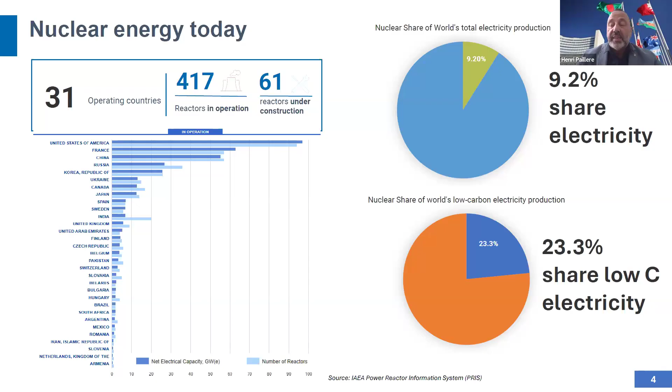But still, nuclear power represents almost a quarter of the world's low-carbon electricity, and this plays an important role in terms of climate change mitigation. I mentioned 31 countries operating nuclear power today, but we have about 30 additional countries that are looking at nuclear power and planning to embark on a nuclear program at some point.

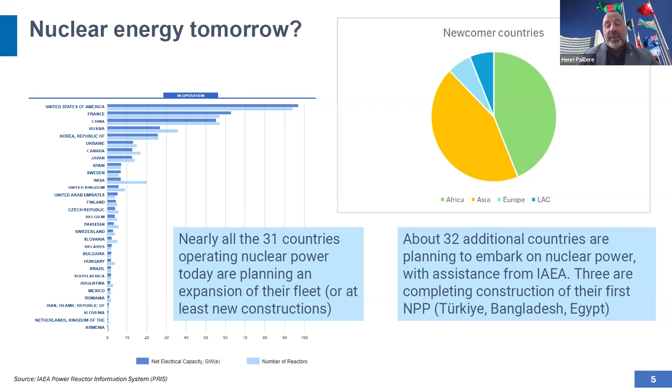The IAEA provides assistance to these member states to help them build the necessary infrastructure to be able, if they make the decision to build, to operate nuclear power plants in a safe way. Among those 32 additional countries, there are 3 that are building a nuclear power plant: Turkey, Bangladesh, and Egypt. And they will soon join the 31 countries operating nuclear power.

So why are we saying that nuclear power is making a comeback, and what are the drivers for this, I would say, revival of nuclear power? Well, first of all, the low carbon characteristics of nuclear power. I think there are always some debates about how low carbon, what is the carbon intensity of nuclear power over the full life cycle of the technology.

But I'd like to refer to a recent report from the United Nations Economic Commission for Europe. They produced a report in 2022 looking at an integrated life cycle assessment of all electricity generating technologies. And they found that actually nuclear power has the smallest carbon footprint among low carbon technologies. We have estimated that over the last 5 decades, nuclear power has avoided about 70 gigatons of CO2 globally. So that's on the low carbon side.

The sustainability is a little more challenging, and there were a number of discussions, especially in Europe, regarding the inclusion of nuclear power in the taxonomy of sustainable activities. And one of the points that was raising a question was the way the industry was managing the waste from the operation of nuclear power plants. The Joint Research Center of the European Commission produced a very thorough report that concluded that actually nuclear power is no more dangerous than any other technologies that had already been included in the taxonomy, and showed how the industry knew how to manage its waste.

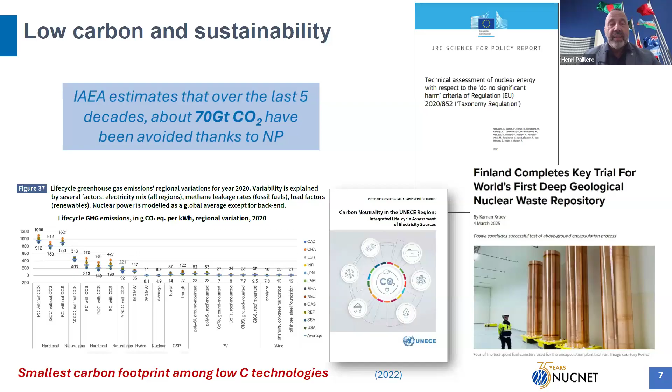Safety is also a matter that raises a lot of concern, but we'd like to look at the numbers. And here on this chart, I've looked at data from Our World in Data, where they look at the number of fatalities per technology per terawatt-hour of electricity produced. And you see that nuclear energy is actually one of the safest technologies around.

Yes, there have been some accidents, but they haven't created so many fatalities. There has been radioactive contamination of soils, as we know in Japan. It has a cost, but in terms of fatalities, overall, the data shows that nuclear is actually safer than wind or hydropower, and much safer than coal or other fossil fuels.

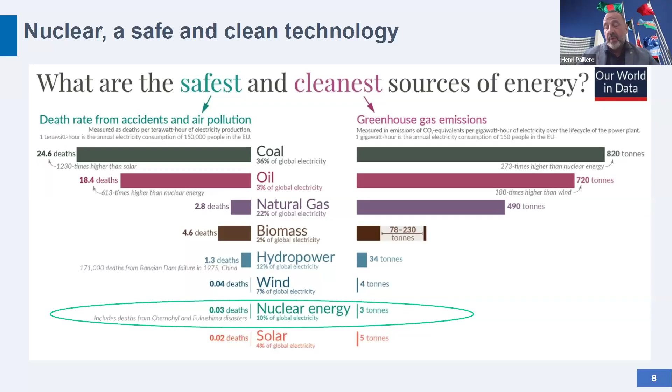One of the reasons why we're looking at nuclear again today is the way our energy systems and our electricity systems are evolving. We know that there is a strong build out of variable renewables, and this poses a challenge for the electricity systems. And nuclear power has a number of attributes that are helping to integrate large shares of renewables. First of all, it is a dispatchable technology, meaning you can generate whenever you need it.

It is flexible, even though there are some people that say that nuclear is not flexible, but there's experience, especially in France, which had from the start the plan to build a very large fleet of nuclear power plants and to adapt to the demand changes. For example, the reactors were designed to ramp down at night so as to reduce production. Now we're integrating technologies that have variable production, so you also need to adapt to variable production across the day.

What is important is that you need this kind of dispatchable technology and a low carbon one. So for countries that have a lot of hydro, maybe they don't need nuclear, but for those countries that have limited hydro resources, nuclear could be an important option.

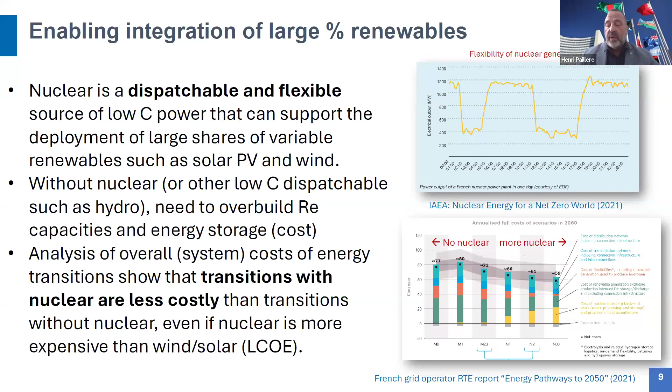A very important aspect also of the transition is the overall cost of the system transition. And what we have found, what a number of institutes have found, is that if you have nuclear in your system, you don't need to overbuild your renewable capacity, you don't need to oversize your storage, and so the cost of flexibility is less, and it translates into a lower overall cost for the system when you have nuclear as part of the mix.

Security of energy supply has been an important driver in the last couple of years, and nuclear helps to contribute to the security of energy supply. And in a way, it's a little similar to how the nuclear fleet expanded in the 1970s following the different oil shocks. And what countries have rediscovered is that having nuclear in their mix helps to secure energy supply.

The cost of the nuclear generation is not so sensitive to the cost of uranium. Uranium resources are widely available, though there are some geopolitical constraints. Nuclear fuel can be stored on site very easily. And in the long term, thinking of limited resources of uranium, you have technologies that recycle the spent fuel in multiple ways, so-called fast reactors with closed fuel cycles, and they would have the advantage of being able to produce for the same quantity of uranium about 60 times more energy than the current technology.

An important aspect also of nuclear power is that in terms of dependence on critical minerals, it is, according to the International Energy Agency, one of the low carbon technologies that is the least dependent on critical minerals.

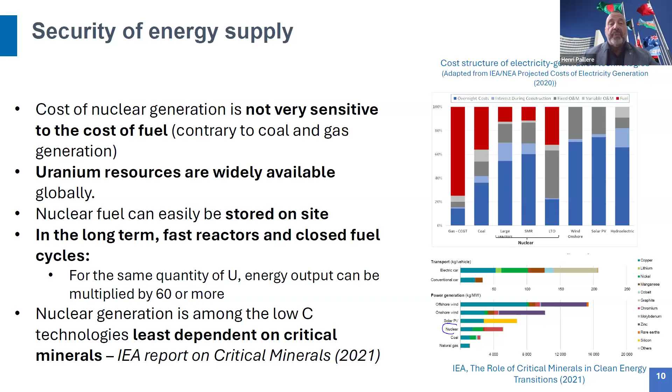Climate resilience is an issue that faces all the countries undergoing their transition. We know that climate change and extreme weather events will impact all technologies, including nuclear power, and can affect the resilience of our current and our future energy systems. Diversification of the mix helps to address the resilience of the overall system.

But from an individual point of view, we have looked at a lot of data. We at the IAEA have a database that contains all the operational data of all the reactors for the last 3 decades or more, and we've analyzed all the weather-related production losses affecting nuclear generation. For example, in summer, when you have heat waves or droughts, some nuclear power plants have to reduce their production, and that translates into a production loss.

So overall, in 2022, about 0.35% of the global nuclear generation was lost due to weather-related events. So it is there, but it is maybe more limited than people might think.

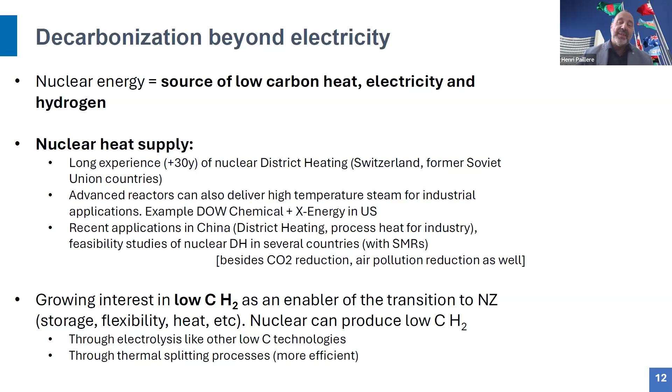Hydrogen as well at some point will also play an important role. There are different ways of producing hydrogen. What we like to say is that it is the carbon content of hydrogen that's the most important, not the color coding of hydrogen. And there are a number of projects that are assessing the production of low carbon hydrogen. I would say cost is currently an issue, and producing hydrogen from nuclear, which is an expensive source of electricity, is challenging in current circumstances.

So a few words now about nuclear power and its contribution to climate change mitigation. We'd like to refer to the sixth assessment report of the IPCC, and in particular the work of Working Group 3 on the mitigation of climate change. We've looked at all the scenarios that are in the sixth assessment report. There are over 1,800 scenarios. About half of them are scenarios that are compatible with the goals of the Paris Agreement, which is global warming under 2 degrees by the end of the century.

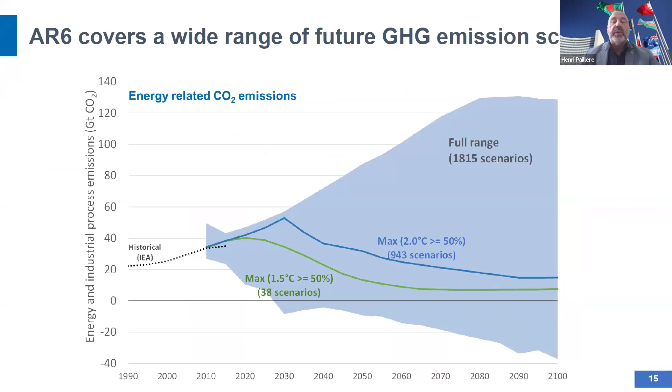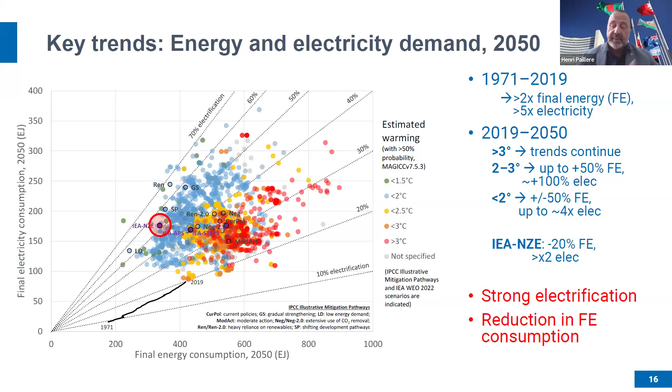We went a little deeper into the scenarios to see how much nuclear is there. On this chart, all the scenarios in blue or green are those consistent with 1.5 or 2 degree global warming. You see two things. First of all, an increase in final electricity consumption, in line with the understanding that we will need to electrify our economies greatly. There's also a reduction in final energy consumption. That's also a very important factor.

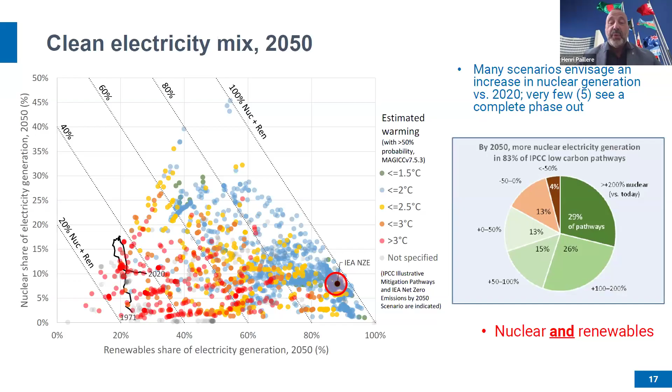Now, in terms of this low carbon electricity in those scenarios, not surprisingly, there's a lot of renewables, but we see a lot of nuclear as well. Actually, most of the scenarios in the IPCC sixth assessment report see an increase in nuclear capacity, sometimes a substantial increase compared to today. This is in the core of the report. Unfortunately, the summary for policymakers goes through a process of filtering, and it doesn't mention nuclear, even though when you look at the actual data, there is quite a lot of nuclear in these 2 degree or 1.5 degree scenarios.

One of the major outcomes of a recent COP, COP28, which was held in Dubai in 2023, was the mentioning of nuclear in a consensus document. The consensus document was the first global stocktake. This was the first time since the Paris Agreement in 2015 that the parties came together to assess the progress in terms of meeting the decarbonization goals. And this COP, the 28th COP, is the first time in 28 COPs that nuclear was explicitly mentioned.

This is a sign that nuclear, on its technical merit, would perhaps have been recognized earlier as a technology that helps to decarbonize, but there's some political pushback by some countries. But anyway, at this COP, it was recognized at last. Also, on the margins of COP28, there was a pledge by 22 countries to triple nuclear energy by 2050. At the last COP in Baku, Azerbaijan, last year, this number was increased to 31 countries calling for a tripling of nuclear capacity by 2050.

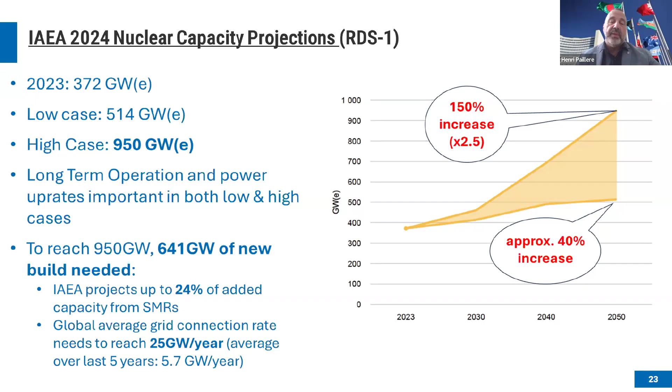And last year, our high case projection showed not a tripling of nuclear power, but a scaling of 2.5 up from about 372 gigawatts to 950 gigawatts of nuclear. What's interesting is looking at all the additional capacity that would need to be brought in, besides extending the lifetime of the existing fleet. And what we saw was that to get to 950 gigawatts, we need to build about 640 gigawatts of new nuclear capacity. Most of it is made up of large reactors, so basically the technology that we have today. But we saw about 24% of this new build was made up of this new type of technology called small modular reactors.

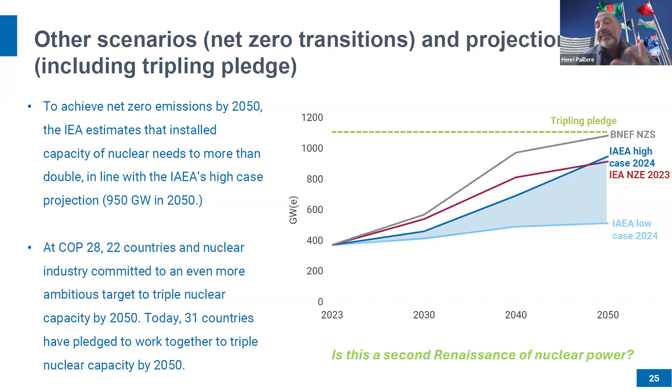I'll get to small modular reactors in a minute, but I wanted here to show you this chart where we have our IAEA high case and low case projections. We see also the IEA net zero scenario, the 2023. There's an update that I should put on this chart, and also where the tripling pledge would see the world going in terms of nuclear capacity. There's also a recent net zero scenario from Bloomberg New Energy Finance. So the question is, is this a second renaissance of nuclear power?

Well, to make it happen, there are a number of challenges that need to be addressed, from developing a robust supply chain, having the human workforce, the resources, but also financing. And I just wanted to have a quick word on financing. We've estimated that to get to our high case scenario, global investments in nuclear power, which over the last 4 or 5 years have been around $50 billion a year, would need to increase to 125 or 150 billion a year for the tripling case. There is a need to mobilize investments for that.

Just as an order of magnitude, as some of you know, at COP28, there was this pledge to triple renewables by 2030. IRENA, the International Renewable Energy Agency, has estimated that to get to this tripling of renewables by 2030, the yearly investments for renewables are $1.5 trillion. So just to say that the yearly investments for nuclear are about a tenth of what is needed to build the renewable capacity. There's also all the investments that need to be made into the grid infrastructure and so on. But just to point out that we hear sometimes the argument that investing in nuclear would take money away from investments in renewables, but really the scale of the investments that are needed are quite different.

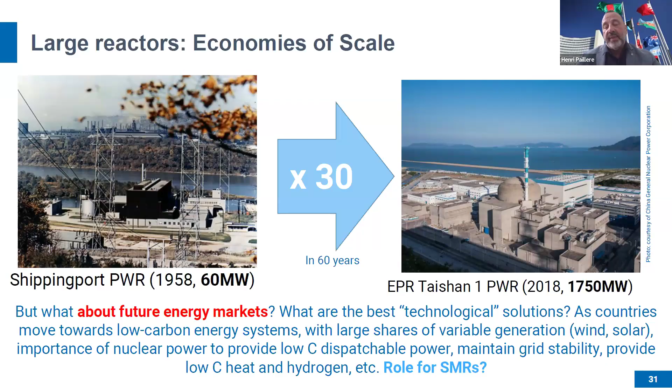And why? We think that basically the energy markets and the electricity markets of tomorrow will be quite different from the ones we've had over the last, I would say, 3-4 decades. We will have systems with higher shares of variable generation from wind, from solar. We will need more flexible, dispatchable power. We need technologies that are able to maintain grid stability and also to provide heat or hydrogen for non-electric applications and decarbonization. So this could be a role for SMRs.

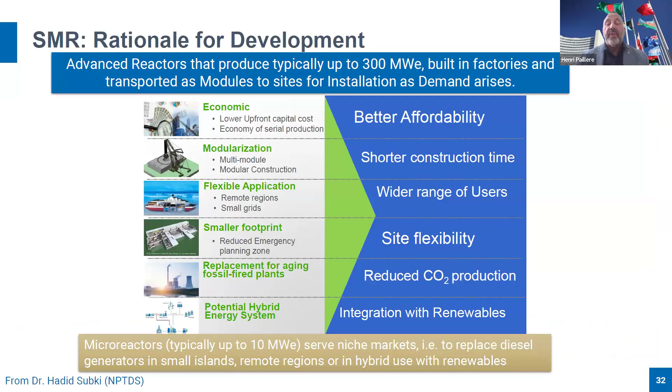Some of the characteristics of SMRs: better affordability, shorter construction time, site flexibility, and integration with renewables. But this is quite theoretical because there are very few SMRs in operation today. Actually, we identified 2 at the IAEA. One is a floating nuclear power plant off the coast of Siberia that's providing electricity and heat. And another one is a high temperature reactor in China. There are 3 under construction, one in China, one in Russia, one in Argentina, but a lot of other designs at different stages of regulatory approval.

Actually, quite recently in Canada, the regulator gave the construction license for the first construction of an SMR, a BWR from GE Hitachi, to be operated by Ontario Power Generation. I'll skip that because I've already mentioned it.

I just want to say some new applications of nuclear power that we're talking about today that weren't in the conversation, let's say, even 5 years ago. One is related to the problem of coal. We know that burning of coal is one of the main sources of greenhouse gas emissions. And there are a number of countries that are looking at replacing coal-fired power plants, especially those that are towards their end of life, by nuclear power plants, in particular small modular reactors, because they are quite similar in size.

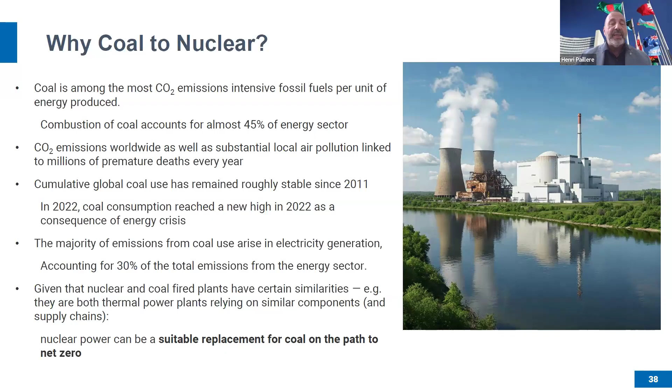Both a small modular reactor and a coal-fired power plant, basically they're thermal power plants. So they have similar type of infrastructure in terms of a turbine hall or cooling needs and so on. So there are different options to switch from a coal to a nuclear power plant, depending on how much of the existing infrastructure can be used. And the more infrastructure you can use or reuse, well, the more savings you can make for the whole project.

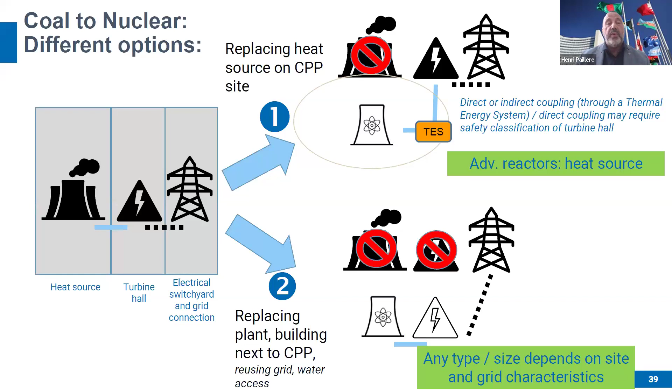There is one project in the US, the Natrium project in Wyoming, which is underway. They started the construction site, and not yet the construction of the reactor, but the discussions are ongoing with the regulator. So coal to nuclear is something that we're talking about. And this year, the IAEA is working with South Africa within the G20 Energy Transition Working Group. South Africa has expressed a lot of interest in the coal to nuclear option. So we're developing a report for South Africa in that context.

The other application that we talk a lot about is artificial intelligence, data centers, and the demand for electricity and clean electricity that these big tech companies represent. And quite recently, on the margins of CERAWeek, which is a big energy conference in the US, big tech companies and other large energy users signed up a pledge to support the tripling of nuclear capacity by 2050.

And the other topic that is starting to be discussed is nuclear propulsion for maritime transport. So this is not new. There have been cargo ships in the past. There are some Russian icebreakers today that operate with nuclear propulsion. There are military ships like aircraft carriers or submarines, but the technology wasn't adopted by the maritime organization. But this is really a hard to abate sector.

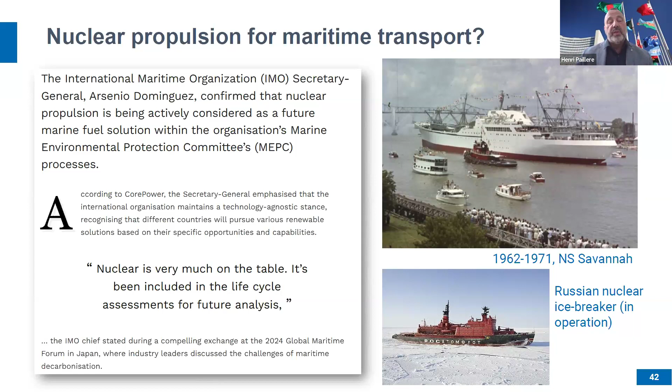Different options are being investigated, and the IMO, the International Maritime Organization, said they would start looking at the nuclear option to assess its viability. So this is an important development that we see could help reduce a lot of emissions from the maritime sector.

So just to conclude, so that we have a little bit of time for questions. Well, I hope I walked you through a presentation to show you how nuclear is making a comeback. We think that the circumstances are quite different from what we called the nuclear renaissance from 2000 to 2010. There is this climate urgency. There is increased need for clean electricity.

Just a few years ago, the projections of electricity demand in OECD countries were quite flat, but in recent years, with the need to electrify the economy, the data centers, AI, countries are realizing that they will need a lot more electricity, and nuclear is becoming an option again. Maybe the realization that if you rely just on renewables and storage, you will not realize your transition. We think all low carbon solutions are needed, and for those countries that want to look at nuclear, they should be able to consider that technology.

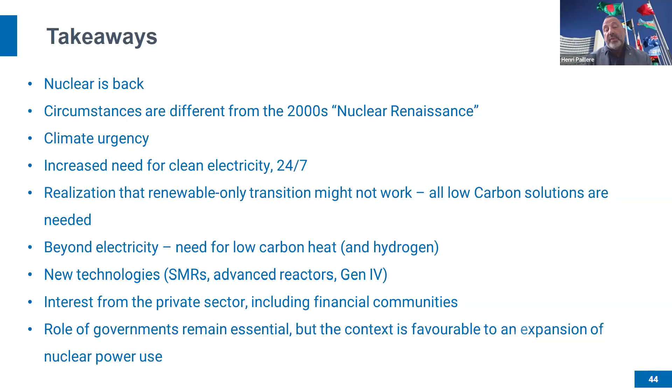We will see whether this happens and whether nuclear will be back, I would say within the scope of what multilateral development banks can finance. But just to also say that the role of governments will stay very important for the development of nuclear power. So I think I have finished here, and Marilyn, I'm handing the floor back to you.

Yeah, thank you very much, Henri, for this very accurate and large presentation. We have a lot of questions, so I will start to consider some of them. First one is about SMR. Do you believe that the SMR could become the mainstream of nuclear energy in the next 3 or 4 decades?

So I sort of answered that in my presentation, because I said in our projections to 2050, we still see large reactors representing the bulk of the new capacity. But SMRs, they were not in the picture just a few years ago, and now they could represent something like 10-20% of capacity by 2050. So I don't think SMRs will become the main technology, but they're certainly part of the picture, and they can address some specific needs which large reactors cannot address.

And there are also questions about cost and flexibility, and I think maybe you need to come back to your presentation to explain the costs and probably the system costs. And the other question was about flexibility and how it is possible to use nuclear to better integrate variable renewables. Okay. So yeah, I mentioned that nuclear power plants can be flexible, and we had the example of France, also Germany.